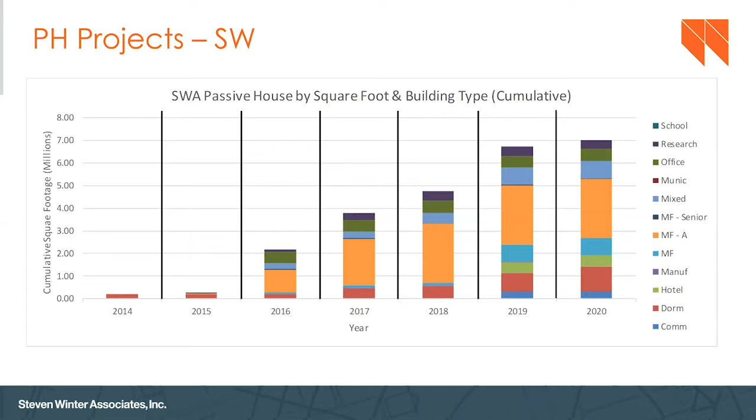As you can see on the legend on the right, it applies to just about any building type out there. It's not just that you can do it on multifamily or housing, you can do it on any type of project. The concepts apply. We've got everything from schools to dormitories to commercial office space, hotels, everything applies. The bulk of it right now is in multifamily particularly, but it spans the gamut of building types. As far as multifamily goes, we're reaching over 7,000 units today in the market that have been or are in the process of being certified.

Monte? Thanks, Lois. My name is Monte Paulsen, and we do similar work. RDH Building Science has about 250 people, and we're an employee-owned company. We work in offices in the US and Canada. Somewhat similarly, we're doing about 5 or 6 million square feet of passive house right now.

We do a lot of mass timber work, including facade engineering for taller buildings, life cycle assessment. We have our building science laboratories in Waterloo. We do future climate assessments, and we do a lot of renewal and rehabilitation. We learn from those existing building projects and apply that to our new building projects. I think you're going to go first, Lois, so back to you.

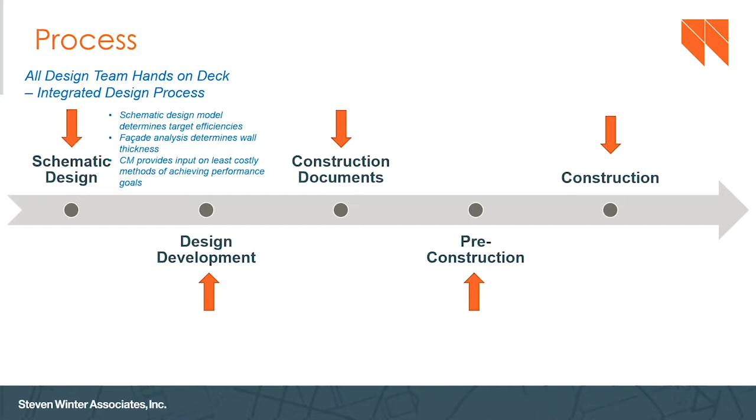So then we move from there into design development. We're figuring out at 100% DD is when passive house steps in to do their next major analysis of your project. Not that we're not at the table talking to you throughout and saying what's possible and what's not, but once you set those floor plates, once we get those layouts set, then we take that building and we create a more detailed energy model. And we confirm that everything we said in schematic is still in compliance. You never know, your window percentages may have changed or things like that. So we're going to make sure that everything is still in compliance from what we told you.

We're also going to start to do some critical thermal modeling depending on some special details you might have, like an overhang that you want to incorporate, or some cantilevering that we didn't know about in the schematic.

So that sort of stuff will get looked at very carefully so that the CM knows what we're talking about for thermal bridges and things like that, and any special materials that they're going to need to order for the project.

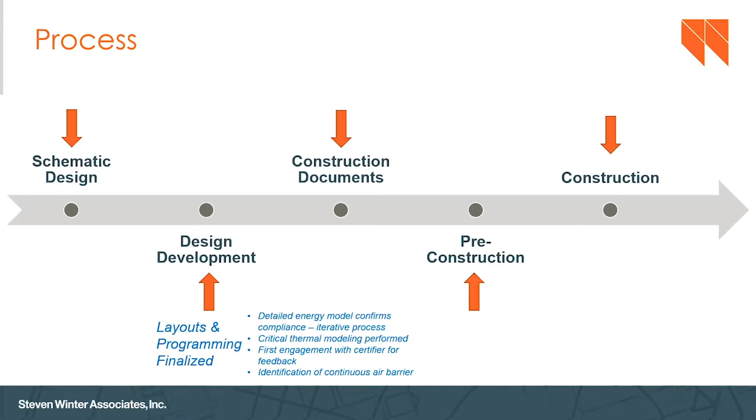This is also the time when we first engage with your passive house certifier, the certifying body that gives you the rubber stamp at the end saying yes, you did it. It's similar to LEED and the USGBC - you work with a project design team to check off your checklist, but in the end that whole checklist goes over to USGBC. It's the same thing for passive house. That whole checklist, everything we're doing, all the documentation, all the modeling has to go to the certifier.

So that's where we first engage with them, because we want to make sure we didn't miss anything big. And if you have a unique situation on your project, we want to get their approval for the way we decided to go through it. This is the time to get that approval, right? You don't want to wait till 100% CDs and have the certifier say, hold on, we don't approve of that. So this is when we usually first engage with our certifiers.

And I always say QAQC starts in design development, right? It's where we decide where your air barrier is going to go. As you know, passive house has a really stringent requirement for air leakage. So this is where you actually start saying, here's my strategy - it's going to be on my exterior gyp, it's going to tie into my roof this way, it's going to tie into my foundation this way, and it's going to tie into my windows this way. At what locations? You have your major systems already in your head about what section and what portion of the building, what surface of the building is actually going to be part of your air barrier. That's how we move forward as we go through design.

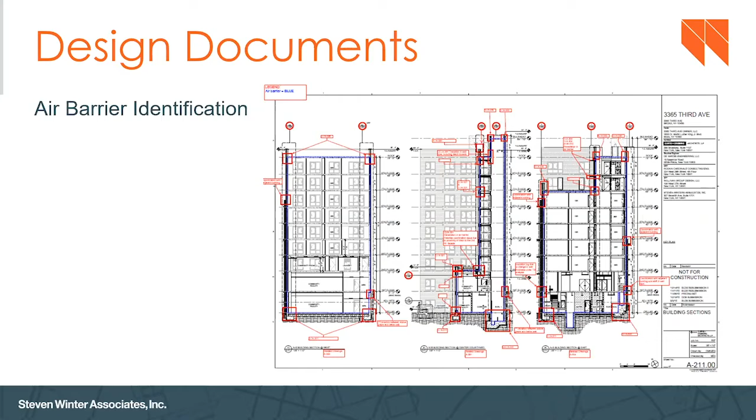Okay, so now we get into construction documents. From our perspective, for the plans we see on these large scale projects, this is where we get into the nitty gritty of our mechanical plans. This is where we finally start to get detailed drawings and riser diagrams and flow rates and things like that on the drawings. This is also where we see the majority of our building details completed - our junctions, our window to wall details, our roof to wall details. This is where the architect really dives in and gives us those up close and personal details. So we dive in.

So we don't just do one review of the CDs. We do a 50% review and then a 100% review. Now, it's not exactly those - sometimes people do a 90% CD set, whatever works best for the team. But there's typically 2 reviews is all I'm trying to get across to you. We do a review of the air barrier connections, as you know, a moisture barrier and all of that stuff gets reviewed here. But we also now start to do comprehensive thermal modeling of all of those connections so that we can make sure we have no condensation issues, no dew point problems within the assembly, no condensation potential on the inside of the assembly, say at the windows where they connect to the wall.

So this is really where we start the bulk, the majority, the remainder of all of our thermal modeling, probably 75% of all of our thermal modeling is performed in the CD set. We also start to create our QAQC tools and processes for the field.

We start to say, here's my checklist of items I need to see when I'm coming out for inspection so that you cannot cover them up. Sometimes we have unique conditions, sometimes regular conditions. A unique condition might be on the roof where I have dunnage and I need to put a thermal block between the roof concrete and that dunnage. That's an out-of-sequence thing that only happens once on the roof at one point in construction, when the blocks get put down on the dunnage. So I need to make sure I see that.

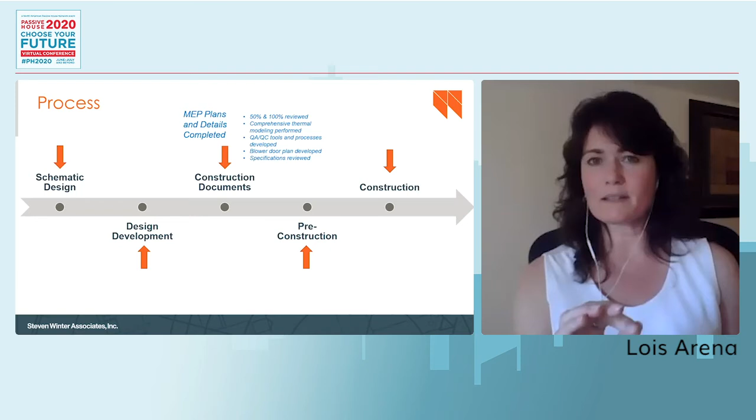For example, the MEP threw an exhaust fan into a room we didn't know about before because it wasn't on previous schedules. Now you've got an exhaust-only fan on a passive house project that we can't account for, that we can't use, that needs to be changed out. This helps us identify these things instead of waiting until we get on site and it's already installed, and then asking what happened. So the blower door test plan is a very useful QAQC tool, believe it or not. It may not sound it, but it's caught a number of things on many occasions.

We also do your specifications review during this period, to make sure plans match specs on everything highly related to Passive House - what your window details need to be, the specifications for every junction in every particular type of window in that building, every fan, everything. So we're going through all the energy-related specifications for our Passive House review.

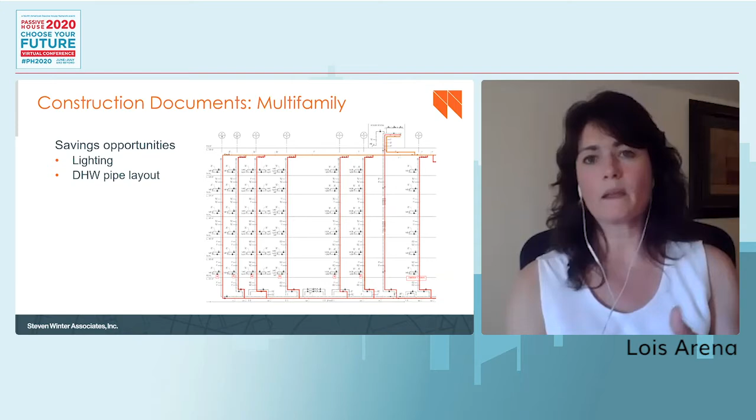So here's a typical riser diagram. But what I also want to tell you is, we're going to talk a lot about cost in this presentation, and nobody ever says, well, what does Passive House save me? It's more than just energy savings. We have on a number of occasions helped the construction team reduce materials in the field that have resulted in dramatic cost savings on top of energy savings.

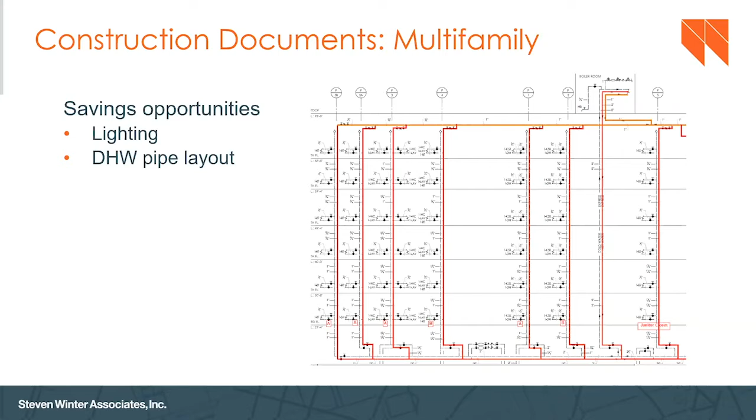So I'd like to give you a quick case study. This is Sendero Verde - all three buildings are part of Sendero Verde, but this is the main tower, a 37-story residential mixed-use tower. There's four stories of retail in the base and commercial, and 384 dwellings. I'm sorry, I forgot to put the gross square footage in.

It is about 350,000 gross square feet of conditioned space. So what happened was when we got the mechanical drawings and started looking at the domestic hot water, we noticed what we consider a 3-pipe design.

I don't know if that's the technical term. This engineer is a very good engineer, I'm not saying anything against him, and this is a very reliable system that they created. What it is, on the recirculation piping, they had a riser going up for a stack of apartments, and then the return loop came down, and it did that for every single riser loop for every stack of apartments it was serving.

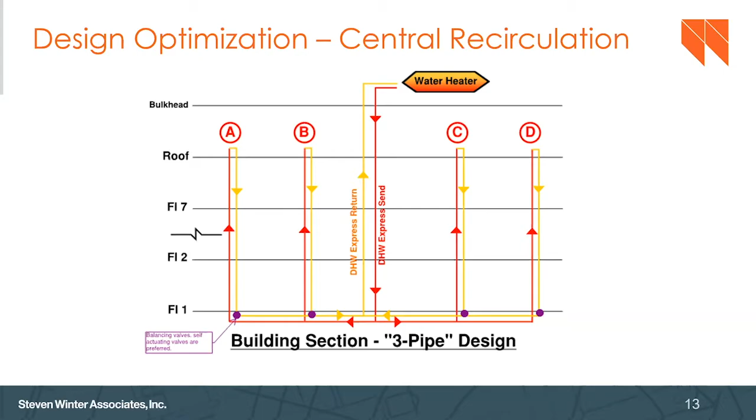The unfortunate part of this is an incredibly high amount of piping. And the more piping you have with domestic hot water, the more heat loss there is to the space, which increases cooling. It also decreases the efficiency of your domestic hot water system because of that heat loss. So what we wanted to suggest, and what we discussed with them, was a typical box design.

You basically have one riser going up, the supply riser that feeds the stack of apartments. You have this one supply length along the bottom like in the other design, and then you only have a simple return loop back to the water heater. This can be flipped where the water heater's in the basement, but basically you've eliminated all the extra risers running up and down the building on that return loop.

This reduced the distribution piping by 40% on this particular project. It's a very, very tall building. It decreased the pumping energy, reduced material cost, and reduced domestic hot water heating costs. That was about 10,000 linear feet of copper tubing, if you can imagine the savings from that.

Now, the concern the engineer had was balancing for this type of system. They prefer the other design because it's a little easier to balance, a little more self-regulating. This one, however, needs a thermostatic valve at the top. That's fine, they felt comfortable with that. Once they talked to the plumbing contractor, they said this is a very typical design.

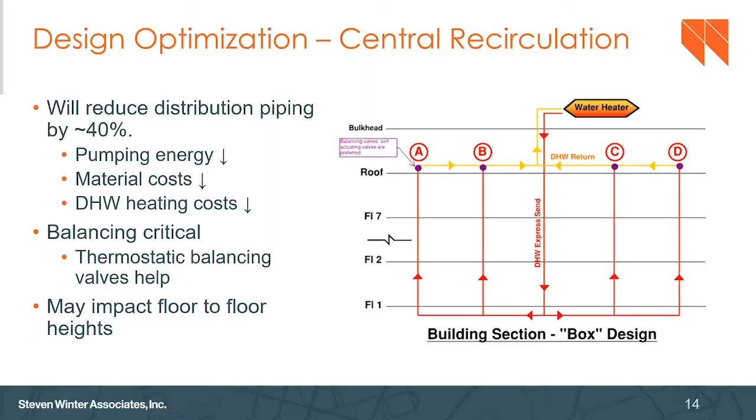And once we did this analysis, everybody was on board—the plumbing contractor, the MEP, and the owner in particular—because they were going to save so much money. So this is the type of thing where doing Passive House is actually a benefit financially. It's not just always a cost.

So they switched from the 3-pipe to the box design. It saved, as I said, 10,000 linear feet of recirculation piping. It was an 18% reduction in domestic hot water heating energy demand, and a 16% reduction in cooling. So this is a pretty drastic improvement in energy efficiency that also results in cost savings to the owner, the developer.

Okay, so that's construction documents. Then we get into pre-construction, right before we start construction. This is where estimating and bid reviews come into play. Your Passive House consultant, believe it or not, is involved in this—should be involved in this—and can help make sure everything is complete and that you're saving money here, because the unknown always results in an 'oh my God' factor in pricing.

I don't want to say the swear word, you know what it is, but what you really want is your energy consultant at the bid-buy meetings to ensure the scope is understood by the contractor. We've had many times, and I'll give you some examples later, of contractors adding costs because they don't really understand the Passive House process. When we review the estimates, we're like, no, this isn't going to be a problem, you can take this out. This never happens, you can take this out.

So it's very important in the bid-buy meeting to sit down with the subs that are going to be bidding and explain the actual scope of work, letting them ask questions so they make sure they get everything. A lot of times they assume it's a typical building, even though you tell them it's a Passive House—they don't realize something in their scope or spec is very different from what they're typically seeing. They don't bid it, we don't catch it, nobody catches it, and then at the end, it's considered a change.

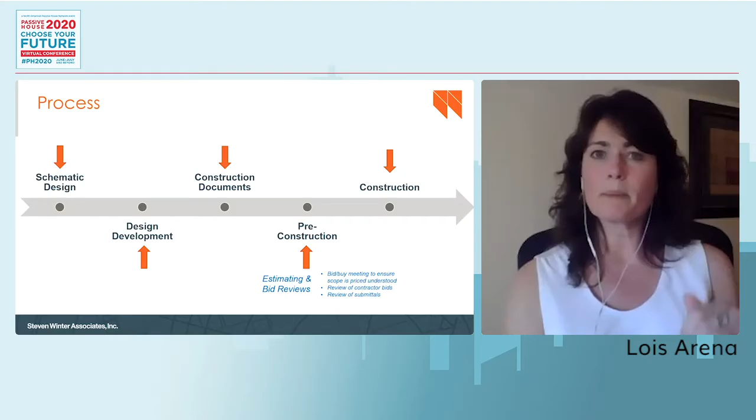So, a change order, you definitely want to minimize those. Everyone knows that. So we want to review the contractor bids, be part of the bid buy meeting, and also review the submittals to make sure everything matches. It happens time and time again where the submittal doesn't meet the performance in the specification, and you'll get, well, that's our typical, and you're like, no, that's not what's in the specification. It's a really comprehensive process when you're part of a passive house project.

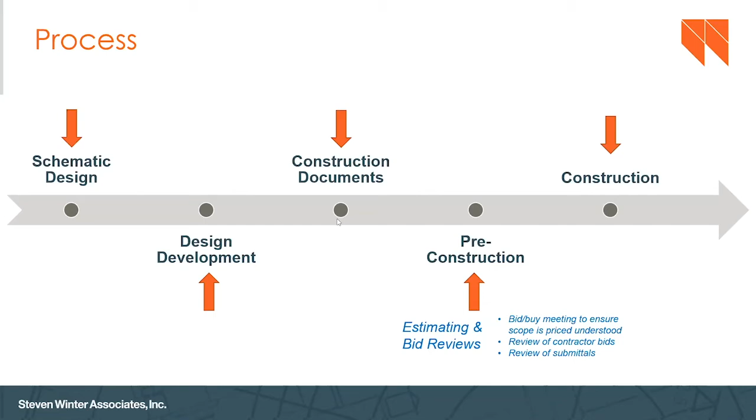Ventilation design and controls - controls are very important, make sure they get into the documents. And then domestic hot water design and installation, as you just saw. We actually have a lot of problems with the wrong thickness of insulation being put around the hot water pipes. So it's really important, if you're going above code, or even just making sure they understand the code - sometimes they'll say, well, we always put this type of insulation on this pipe, and you're like, no, the code here says you have to use this. Making sure whatever they're installing in the field matches what was modeled and what was in the specification is really important. This is just an example.

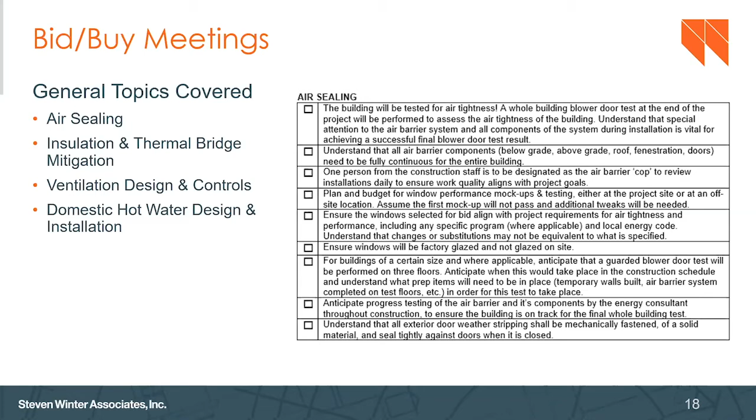So we do a pre-construction kickoff meeting. These are an example of those checklists we were talking about, where we go through the plans and specs - the drawings, plans, sections and details - and make sure we call out anything that's not typical on the project. This is a very atypical detail that was on this particular project, so we had to call it out and let the contractor know we would need to be inspecting this detail.

So during the construction kickoff, we go through the inspection checklist with them. We tell them what our intermediate testing plan is, what the blower door test plan looks like, who will need to be on site, and that we'll be revisiting that blower door test plan when we get closer to the end of the project. You can't expect everybody to remember that sort of stuff, but it's just a good eye opener at the beginning of the project that this is all happening, and the subs need to know that.

We also do an MEP kickoff with our HVAC subs, because it's in the drawings and in the specs. They're not used to doing passive house, so we need to make sure they understand the requirements of the mechanical system, the controls, placement of exhaust vents - sometimes incredibly crucial, needing to be a certain distance away from certain things. So we want to make sure the HVAC subs are really on board with what needs to happen.

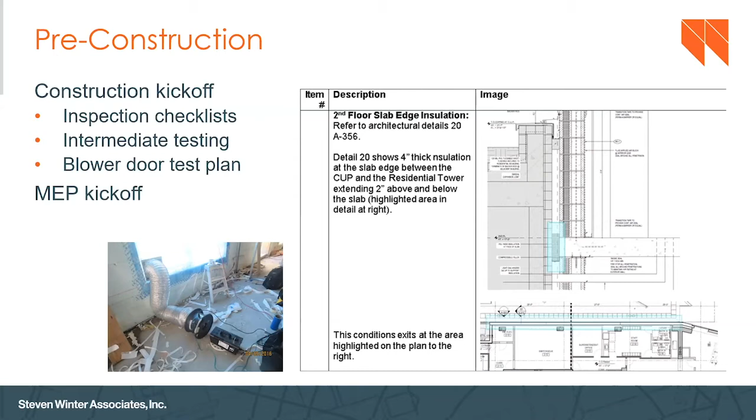Okay, so finally, you're ready - everybody's up and running. This is where our QAQC actually kicks in. We start our contractor trainings, we do mock-ups for the actual trades in the field. This is when we start our site inspections of all the insulation and all the passive house related issues we need to confirm and photograph. We also start our intermediate testing, our mock-ups and window testing, and any other component we're worried about for air leakage. And we attend meetings and provide additional support to handle things like RFIs - okay, how is this attachment really supposed to work?

Or, you know, I can't get this insulation in there. It's too thick. Can I use a thinner insulation? And so this starts this process. There's always a portion of additional technical support during construction that we deal with.

This picture is just an image of a mock-up test for a window. This is what we call interim blower door testing. For large projects, you can't stop the project halfway, once it's dried in at the top, and just do a whole building blower door test before they drywall, because that's not how it works. Drywall starts at the bottom before they're even finished at the top. So we had to find mechanisms to test things as we went along.

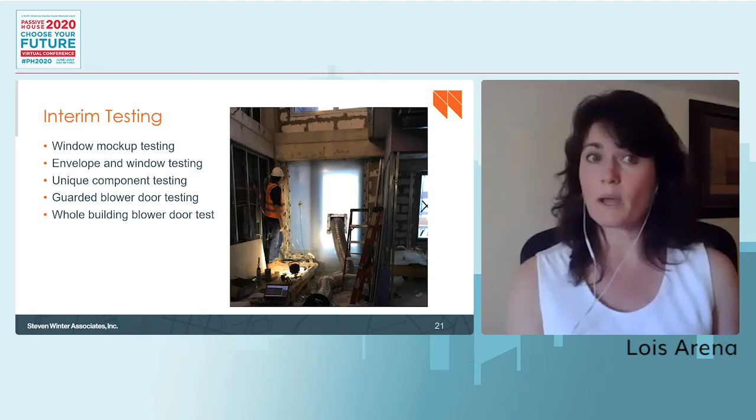Interim window mock-up testing, envelope and window testing, any unique components like trash chutes or odd things we're worried about, we can test as well. You can test a whole floor at a time with a guarded blower door test if you're very, very concerned. It does take maybe a day or two away from the construction staff because we have to shut the site down, at least on those floors.

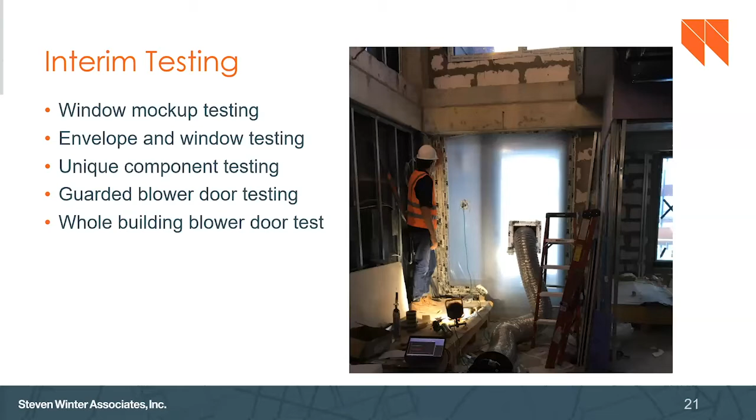But it's a very useful test to give people peace of mind if they're uneasy. And then at the end, we do the final whole building blower door test, which is what this looks like. Everything's hooked up to our trusty computer. All the fans are tied in, and we pressurize and depressurize the whole building at the end to make sure you've met your goals.

But this is like the last step. This is the cherry on the cake. You've done everything you needed to do at this point. You've got all your inspections, you've got approval on everything, you've done all your interim testing, and your contractors have learned the whole way. And then at the end, we do the final blower door test.

So Monte, that's my spiel. Back to you. Thanks, Lois.

That was great. I really agree with the timeline, the focus on early involvement of design, early involvement of the certifier, and the real focus on kickoff meetings with specific teams. So important. Okay, so how much does it cost to do all this?

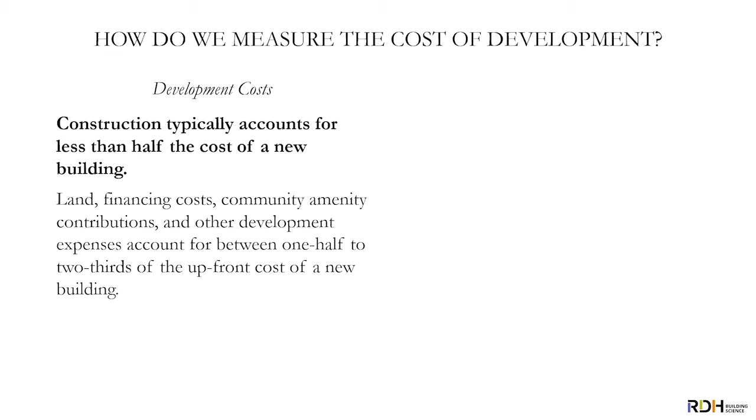We do work on large urban buildings, such as those Lois has shown. We also work on a lot of affordable housing projects, wood frame mid-rise. We see that development cost typically accounts for more than half the building, and construction costs less than half the building. And we note that operational costs can be a bit lower in Passive House.

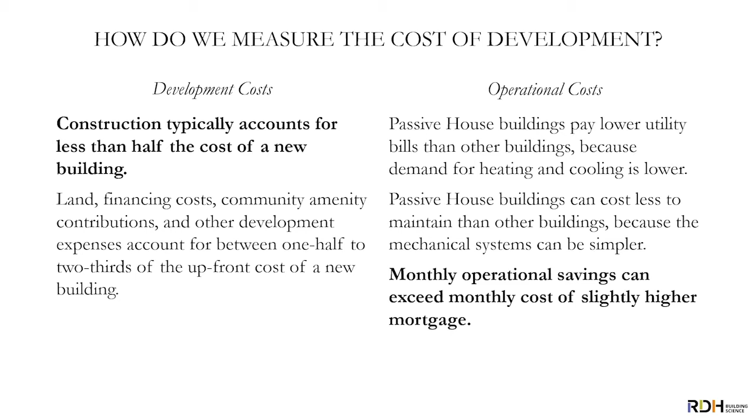You have lower utility costs. You may have lower maintenance costs, depending on how it was designed. For many developed Passive House projects, the monthly operational savings can exceed the slightly larger mortgage on the project. So it's important to note, construction cost is only a portion.

At the low end, we see projects around $250 a square foot, not just Passive House, everything. And at the high end, towards 500. A 5% construction cost increase on that low end is still only a 2.5% total cost increase. And that 5% construction cost increase can be as little as 1.something% of the larger building.

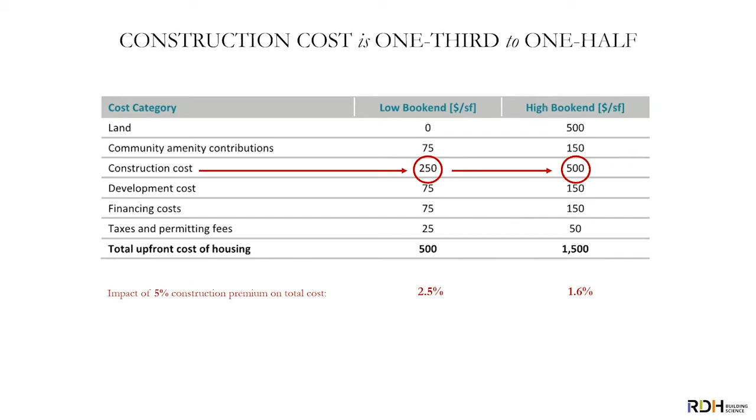Nonetheless, the question I get almost every single day is, how much does it cost to build a Passive House? And they're looking only at the build costs. So let's answer that briefly. Three studies I'd like to show really quick.

Just to put those numbers in context, 1,500 pounds per square meter is approximately 172 US dollars per square foot at the current exchange rate. Now I would note most of these were built over the last few years when the pound was a little stronger.

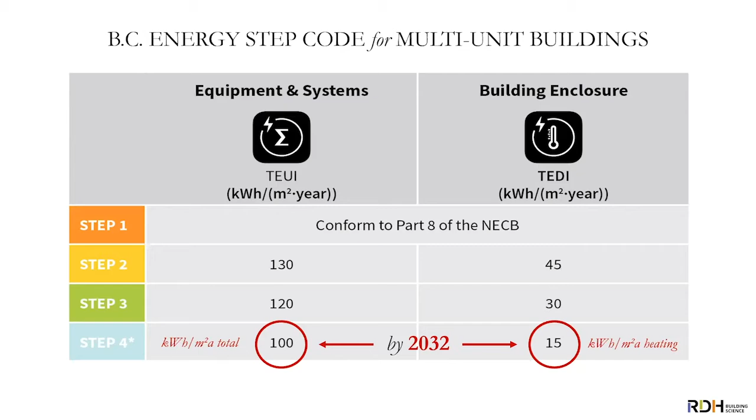A second cost study that we reference here in British Columbia quite a bit is when we introduced our STEP code, we did some studies on how much it was going to cost to do this. Now, the STEP code is not exactly the same as Passive House. By 2032, all of our buildings will be at a 15 kilowatt hour per square meter heating limit, very similar but not identical to Passive House because the floor space is measured differently, and a total energy limit of about 100 kilowatt hours per square meter. So similar but not identical.

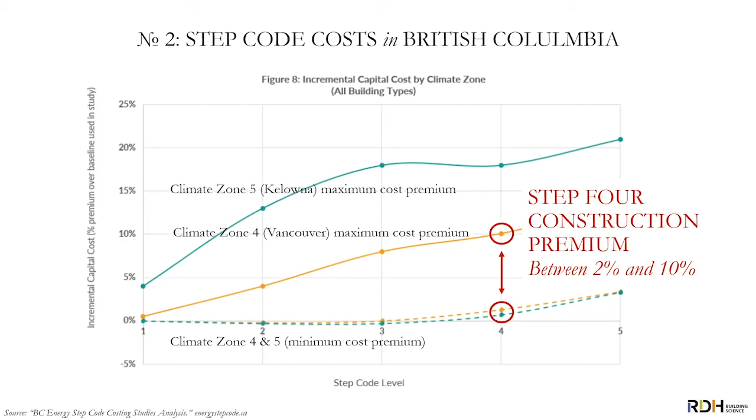That study found that to get to those step 4s in most of our climate zones was about a 2 and a 10% premium. We would say that's been consistent with what we're seeing in Passive House.

Our first larger multi-unit Passive House here in Vancouver had about a 5% additional construction cost. Now, again, that building is paying off. The overall operating costs are very low, but it had about 5% build cost. By this year, we've seen this project at step 4 and a couple of other Passive House projects coming in pretty much at par with construction costs in the area.

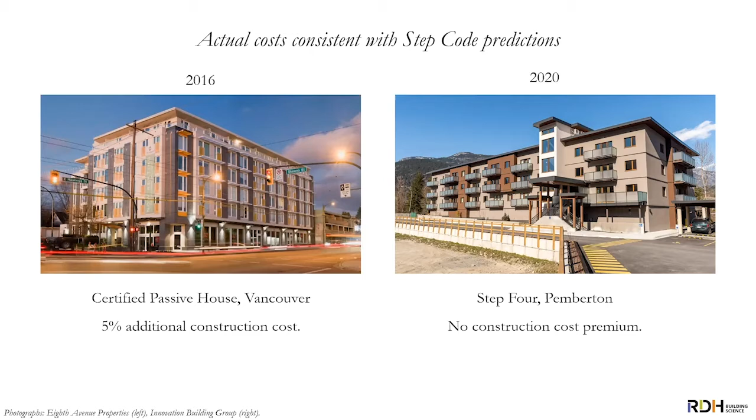I would add that the Vancouver Zero Emissions Building Exchange, or ZEBx, is surveying construction costs, and we hope to have a more in-depth report on construction costs for buildings in our region published later this year, so please stay tuned. And the third way to look at construction costs is some data from Pennsylvania.

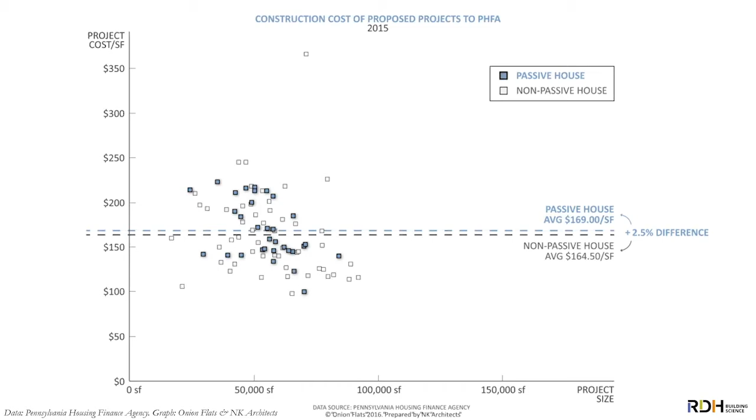In 2015, the Pennsylvania Housing Finance Agency added 10 points for Passive House projects to their scorecard. And what happened that year was they got a whole bunch of submissions. Here's some graphs that were put together on this. The Passive House proposals ran about 2.5% higher than the non-Passive House proposals in that year.

Interestingly, however, by 2018, the awarded Passive House projects ran about 2% less than the awarded non-Passive House projects. So you're seeing at these affordable, focused, mid-rise, typically wood frame Passive House multi-unit buildings, we're very, very close to other construction costs. And I just want to look at 4 quick case studies in case you're still skeptical.

I chose ones around North America since this is, after all, a North American Passive House project. So the project we just looked at in Vancouver, 85 unit market rental. This had the difficulty of not originally being designed to Passive House, but being converted early on. That generally drives up costs quite a bit. This in US dollars was about 170 bucks a square foot.

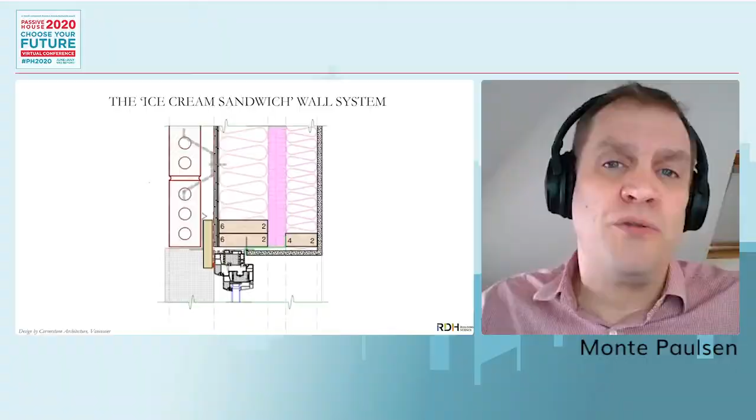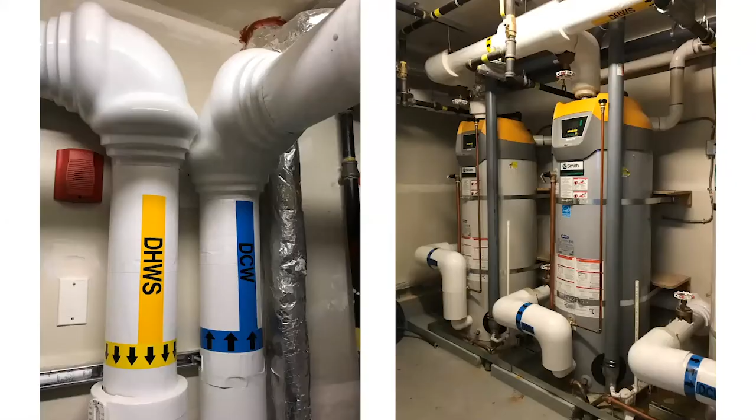Had a really simple wall assembly designed to require as little trade change as necessary. The trades framed and clad the building the same as any other. Really simple interior insulation strategies at the parkade and the commercial levels. Really simple mechanical systems, not that different from mainstream practice at the time. Pretty typical fit and finish for this market. About 225 Canadian, again, about 5% construction premium.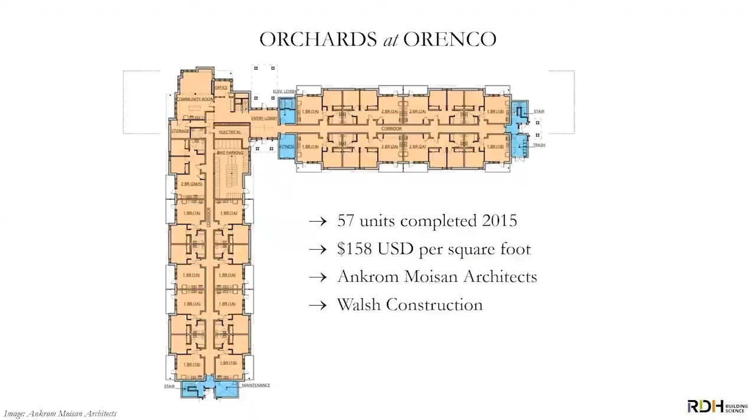Portland, Oregon did a great project about the same time. Orchards at Orenco, some of you have probably seen this. This was about 158 US per square foot in 2015. Pretty simple form, simple mix of a thick wall and a little exterior insulation to limit the thermal bridging.

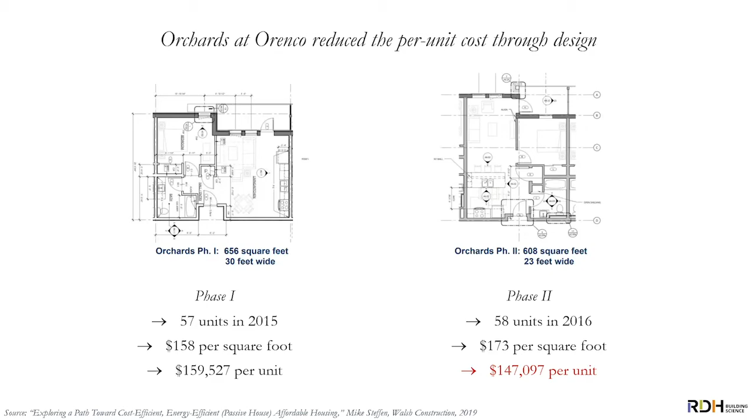What's really interesting is the same project changed its design for its second phase. On phase 2, they had a higher per square foot price, but a lower per unit price. So they actually produced more units for less dollars by redesigning the units a little bit. This emphasis on elegant, efficient design that both saves money in construction and makes the building more efficient from an energy perspective is a big part of what we're working with an awful lot of nonprofit and market rental developers to do, to find ways to build Passive House for less.

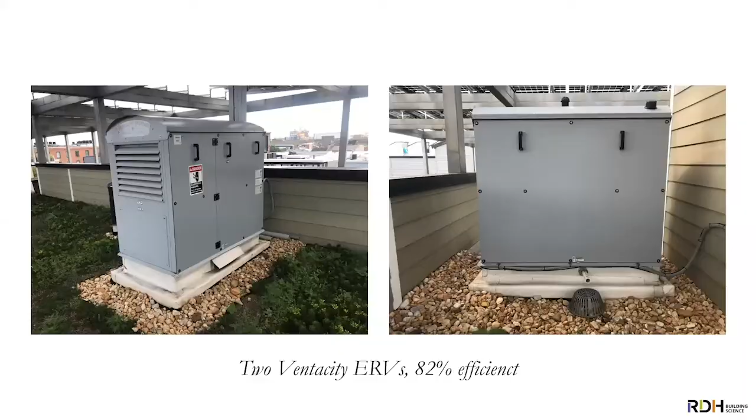Philadelphia, Capital Flats in 2017, 169 per square foot, including some solar. This used the prefab wall panel, the smart panel system, as quite a few of the really affordable minded projects have. Simple windows, simple form, simple central ERVs. Those 2 ERVs serve the whole building. And 25 one-bedroom suites for about 169 per foot, or 146.6 per unit.

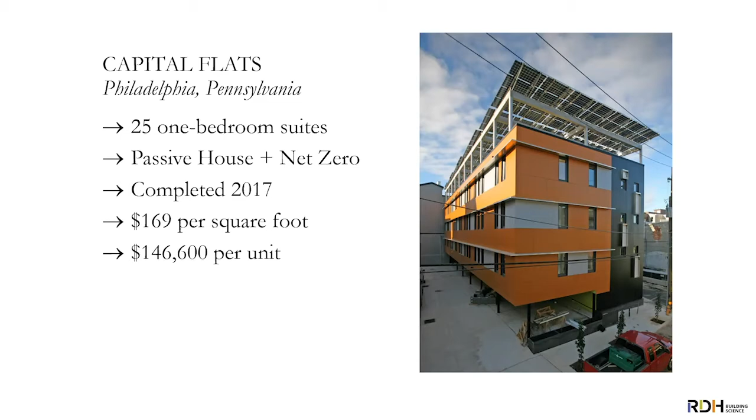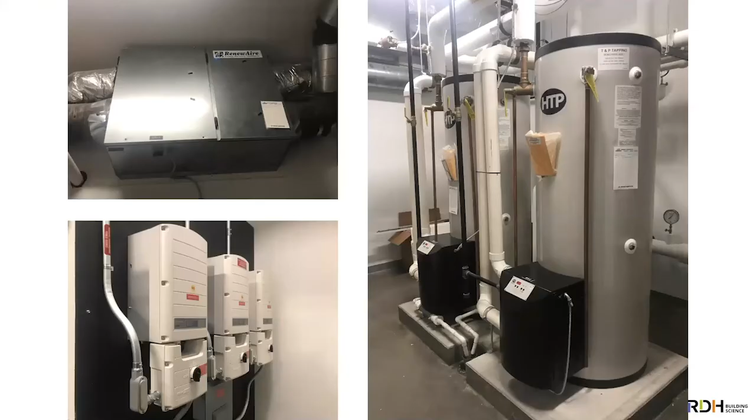And then final kind of a cost winner is Bayside Anchor in Portland, Maine. A really simple, thick, blown insulation, super simple form factor. This is an infill project in an existing affordable housing development. As you can see, really simple, affordable housing. So simple, they didn't even put cabinet doors on in the kitchen, but a perfectly nice unit in a fantastic neighborhood in a great city. Really simple mechanical systems. Central service area that served other buildings as well as itself. 149 bucks, 150 a square foot US.

Personally, I would say it's possible to accept a lot of sort of adjustments for those prices. So you look at these 4 projects, and we could have picked another 4 from the same time. We just had to kind of draw the line somewhere.

170 to 149 per square foot in the 2016 to 2018 range. The market standards across the US in that same year, as reported by RSMeans, are kind of 169 to 223 per square foot, with 261 as the high in Chicago.

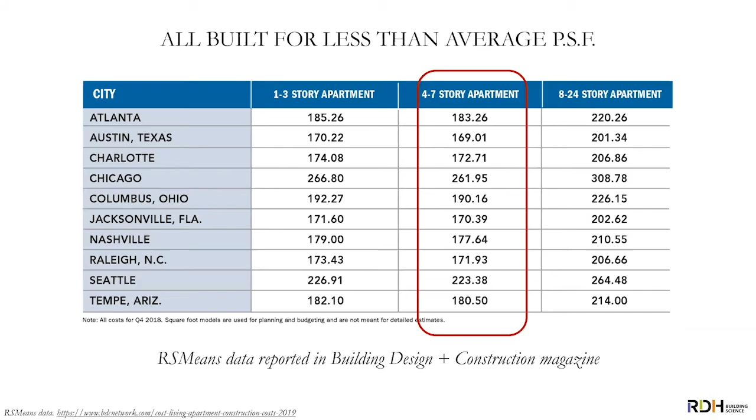My point being that all of these developments, and quite a few others, were at par for regional affordable housing rates during this time, and we can still do that even in the difficult economy we might face going further. With smart design, Passive House or near Passive House projects don't have to cost more. Back to you for just a few, to look at costs on your projects, Lois.

Thank you, Monte. That was a really great summary of affordable housing. I'm going to take you to the New York City area, the Ritz-Carlton of affordable housing projects.

Our prices, I don't have the ranges here on this slide because we're trying to keep most of this information anonymous, but I have 16 projects that we were evaluating, all large scale Passive House projects except for one. They're all over 35 units per building. The large ones are like 50 to 150 units per building. The extra large are 150 and over, so somewhere in that range.

So really large projects. The price per square foot on these buildings in Manhattan and the boroughs are more like upper $300 per square foot to close to $700 on some projects. What I'm showing you here is the average increase, in the 4th column, to do construction over Passive House - anywhere from 1 to 8%.

And I've highlighted those projects that have had Passive House experienced team members on them. If you look, you can see every single one of those was either 5% or less increased cost above their baseline. The two in blue are dormitories, so they're not an exact apples to apples comparison to the other buildings, but they are highly dense.

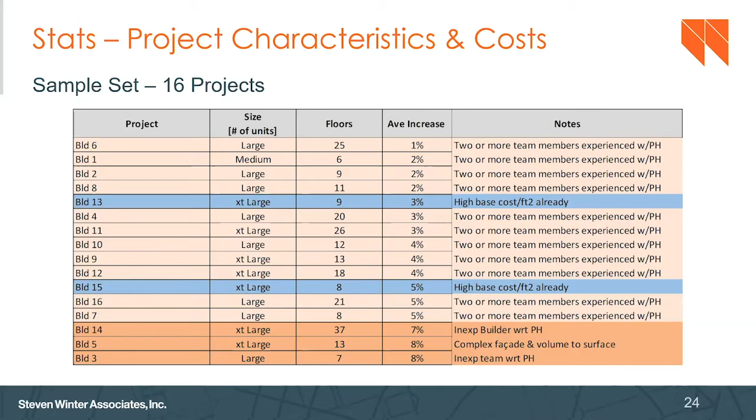Now you have to keep in mind, several of our builders, when we were talking to them about the survey, said, you know what, we don't price a building as non-Passive House and Passive House. We have a project and we price it at Passive House. Every building we do is different. It's going to cost a different amount of money on a different site. They all have different challenges, especially in these urban areas.

So it's not like we really know. They're like, isn't it just about quality? And shouldn't quality be part of affordable housing? So it is a very interesting set of comments that we got back from them.

But of that subset of buildings that I just showed you, here's the range of certain characteristics I wanted to show you. So we ranged from 30 units, by far our smallest, to 385 units in the largest. On average, we have 184 units per building, and that's a pretty good number.

Gross square footage ranged from 33,000 to 386,000, so 10 times larger. We had anywhere from 6 to 37 stories of building, and the increase for Passive House ranged from 1 to 8%. Total project costs ranged from about 12 million to 233 million. So I'm just trying to give you a feel.

Here's that cost per square foot range I was telling you about, $300 per square foot up to $832 - a huge range. The average was about 527. So, just a massive increase in cost. Anytime you go above a certain number of stories, you really increase your cost per square foot for your project anyway. That's a fact of mid to high rise construction.

What I wanted to do here was quickly try to see what building characteristic was actually going to increase the cost the most. What was the biggest contributor to cost increases? Was it number of dwelling units?

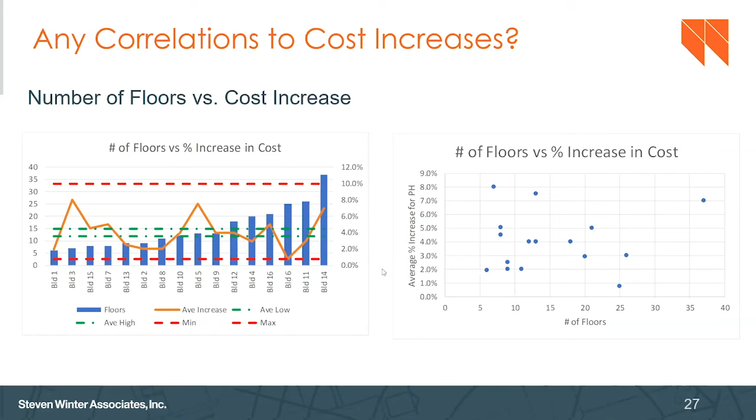Number of floors - we did the same thing. As we get taller, does it get more and more expensive to do Passive House, or less and less? Again, you'll see all over the place with these numbers, buckshot again. So no direct correlation to height of the building or number of stories.

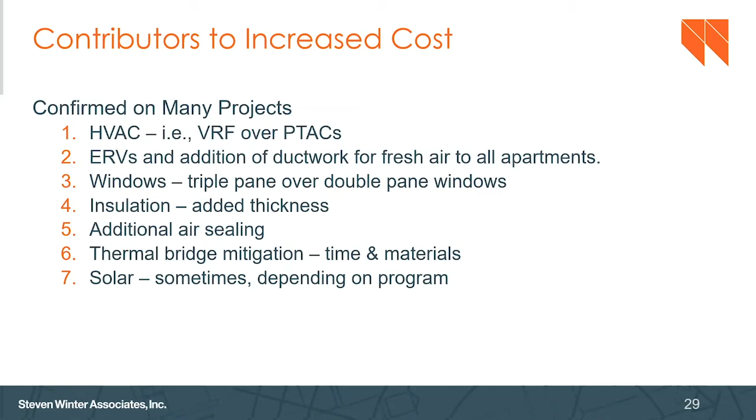Now what I will tell you is these are the main factors - the biggest cost contributors. Everybody we asked, the top 5 are the top 5. This is what they said added cost to their project. HVAC - the standard VRF system over a typical PTAC in a high-rise building, that's going to add cost.

ERVs - the addition of fresh air supply to all the bedrooms, and some of the controls. The ERVs themselves are a little more expensive than exhaust fans, but it's really the addition of all that sheet metal work that has to happen. Windows - we're typically seeing the increase from a good double pane window to a good triple pane window. That's the cost increase there.

Insulation, added thickness - this is a little bit arguable, because on a really well-designed passive house building with a nice surface to volume ratio, we're not looking at insulation values much higher than code. It really comes down to the detailing and thermal bridge mitigation - what special materials do I have to use to separate my cladding attachments and that sort of thing - and then the additional air sealing.

Honestly, I think this is just where the scare factor is. People hear that they need to be 10 times tighter than code, and there's an additional cost on it, when really you can do air sealing with your typical materials - it's just attention to detail. Once contractors actually see what they need to do, it's just a matter of completing that air seal in a more complete way than they're used to. I think that cost is going to sort of go away on us. So that's one of those costs there.

So the questionable one we heard was training of construction staff. To an extent, yes, but it really is part of what we usually do. We've had teams hire a special air barrier, air sealing consultant, and we've had teams that haven't, and we've passed the blower door test on both ends. So really, I think this is a questionable cost that people are just afraid they're going to have to do.

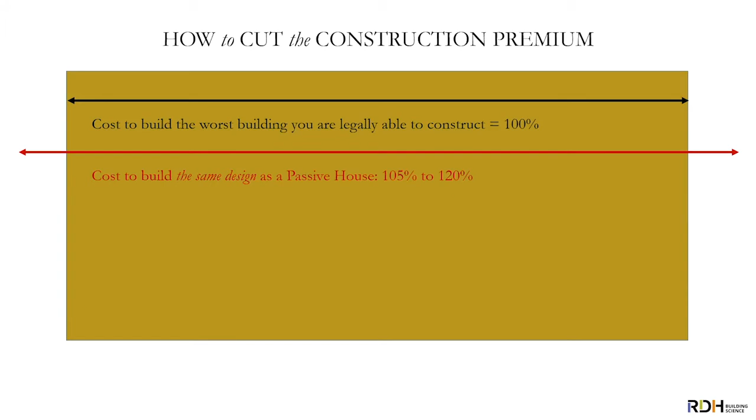And I do want to be clear, if you take the exact same design as the building you might have built alternate and cost it as a passive house, it's going to be more. You're going to put more on it without taking anything away, without changing anything, without rethinking anything. So if you build the same design with no awareness of change to the passive house standard, you should anticipate 105%, and we've seen 1 or 2 up near 120%.

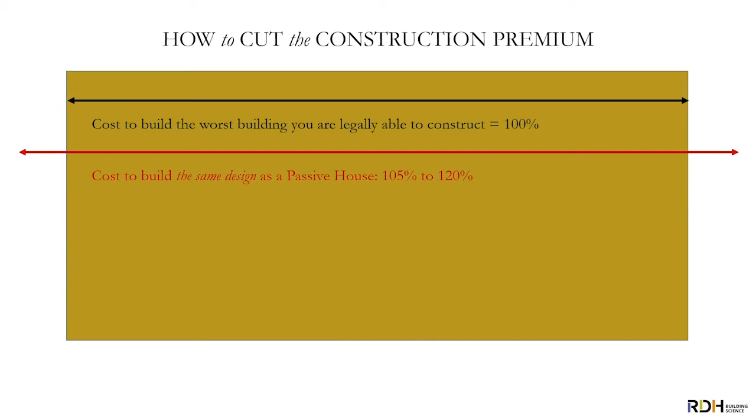But you wouldn't do that. You're not going to take a pre-passive house design and build it to passive house standards. You're going to redesign the building and rethink the process, as Lois and I have been trying to describe. Think of it this way conceptually.

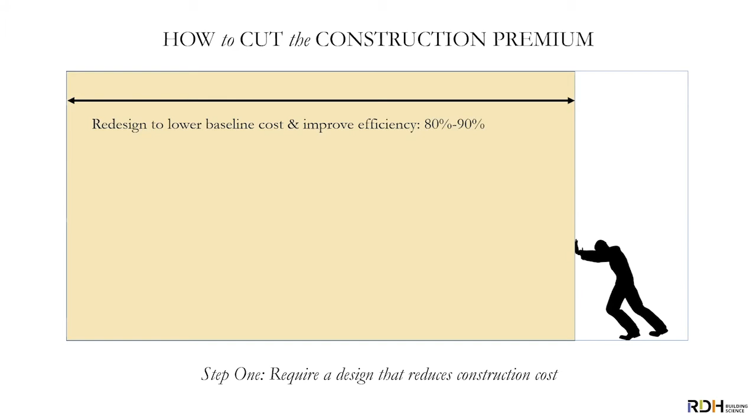First, shrink the building, lower that baseline cost by being hard at the front end, by really asking, do I need all of that glazing? Do I need that jump out? Do I need this, whatever the feature is? Limit the window-to-wall ratio, reduce the enclosure surface area, demand compact mechanical cores, triage step backs and balconies as much as possible within your jurisdiction and your purposes.

Make the tough choices before you hire your architect. This is your job as an owner or as a developer. Put your tough choices, your metrics in your owner's project requirements. And I want to point out, that's the document.

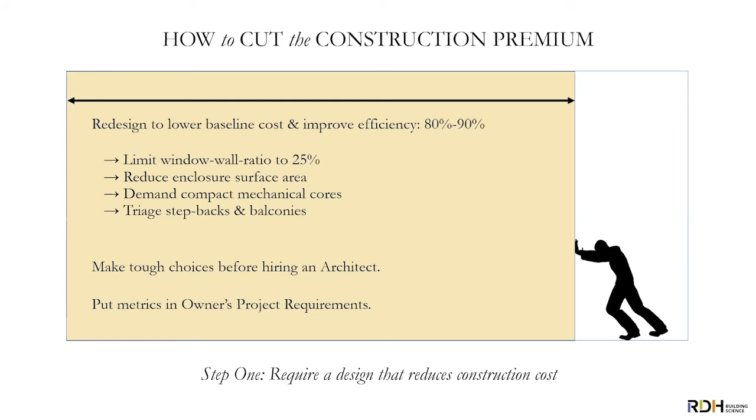This is your opportunity, and that's you pushing back on these things. You're the only one who can do it. It is not going to work asking your project team to cut 10 or 20% out of something. It's the owner's job, and the owner can do it most powerfully at the beginning of the process.

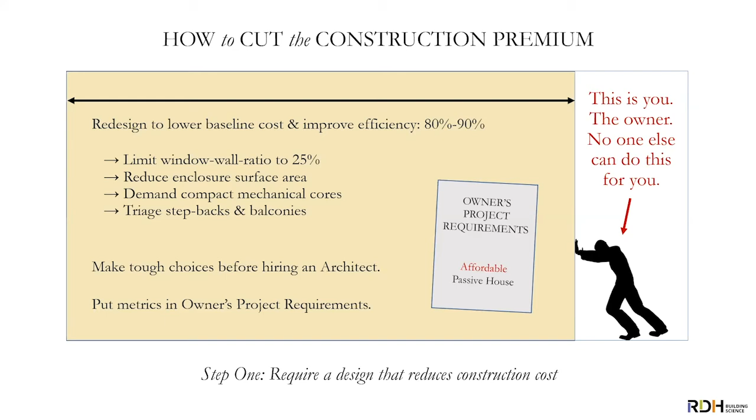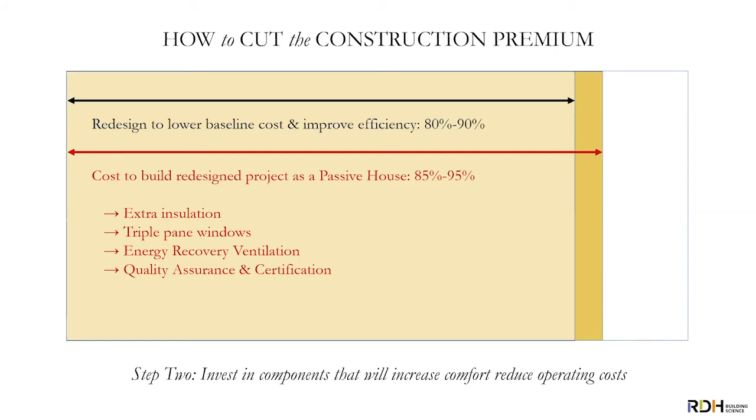So having reduced the baseline costs, then you can add back some of those things Lois just pointed out. A little bit of extra insulation, triple pane windows, the mechanical systems that drive these large multi-unit or other complex use passive house projects, the quality assurance and certification processes, all those visits Lois talked about, those cost money, those cost time.

Add back 3, 4, 5% for those above your carefully redesigned building, and you are still ahead of your original costs. And what I've seen the best projects do is they get really hard at the front. They add the minimal additional cost for passive house, again, making this approach clear in the OPR. And then with the slack they've got left, they put in what they love, what's important to them as a project.

Maybe it's a big bright stairwell under a skylight, or a photovoltaic pergola over a shared roof deck, or real brick cladding or some other feature. But they take all of that stuff out in the baseline so they can get to where they want to be.

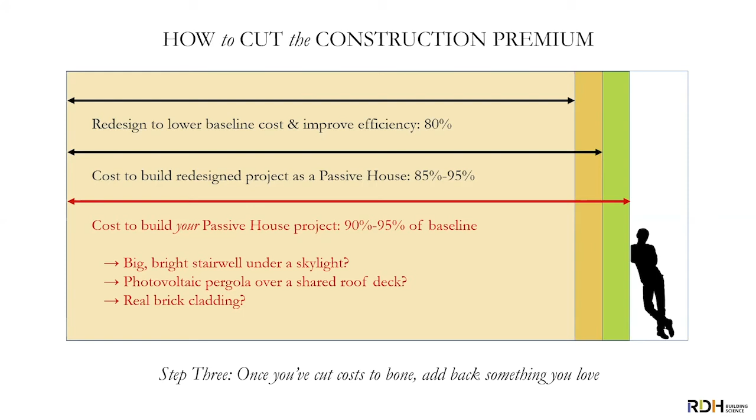This approach works. Whether formal or informal, this is the approach that each of the projects we showed earlier, those 4 very cost-effective projects, followed.

So you might ask, what should you put in owner's project requirements? I just want to say there's a good example of an owner's project requirements on the ASHRAE site. They created their OPR for their own headquarters. It's quite detailed, and it's a good example of a great OPR document. You're welcome to Google it.

A not such good example is this, and I'm leaving it anonymous, but here in the OPR, the early documents are saying, well, we're not going to pursue any certifications, but we want this program to exceed Passive House, to exceed Net Zero Plus, and to exceed Living Building Challenge without certifying or doing any quality control to anything.

This is a real document, and I apologize if you know who it is, but I do see this kind of approach routinely from owners. This well-intentioned owner has not made the hard choices. This owner has not done the pushback before bringing the consultants aboard. And this owner will struggle with costs all the way through the project as a result of not being disciplined at the front end. So what would you put in?

I just want to list 4 things that I would put in if it was my project. I would demand that the project lay out mechanical first. I would demand a minimum surface area given the rest of the project. I would force the facade to follow function, and I would set a target for window to wall area that was appropriate to the project. And I would repeat what works and look for creative repetition as much as possible. I'd just like to share a few thoughts on each one of these ideas.

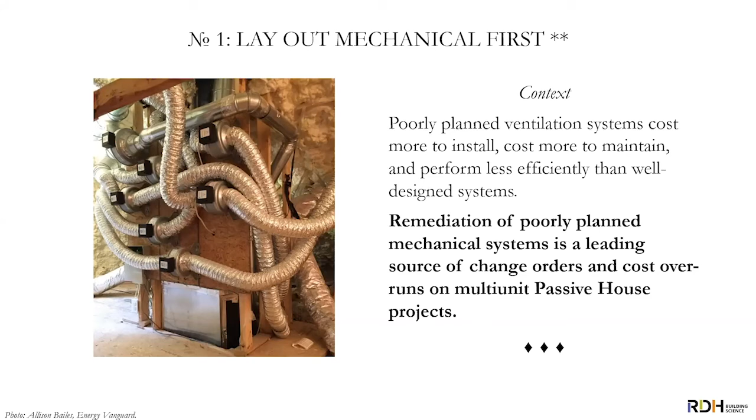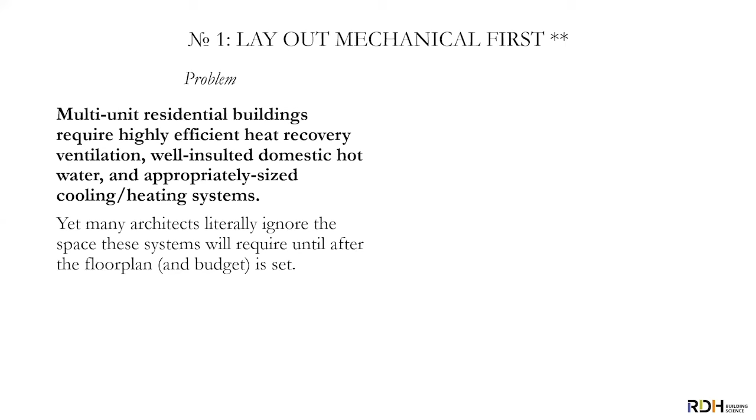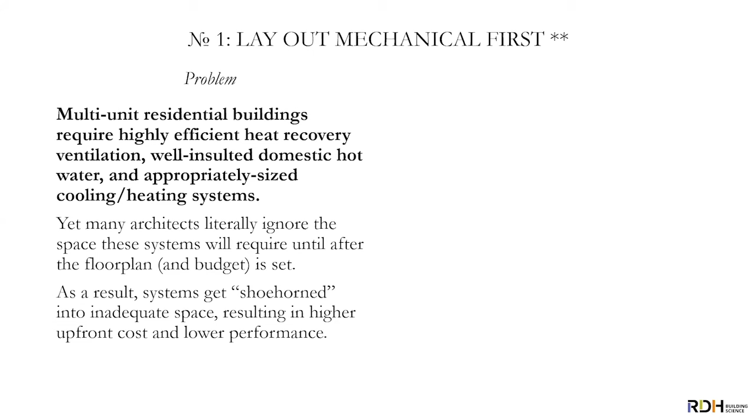Multi-unit buildings require highly efficient heat recovery, well-insulated domestic hot water, as Lois showed. And yet many architectural teams are kind of ignoring these at the critical early stages, figuring it'll get taken care of later. As a result, systems get shoehorned into what space remains rather than designed to be low cost in a space meant for them.

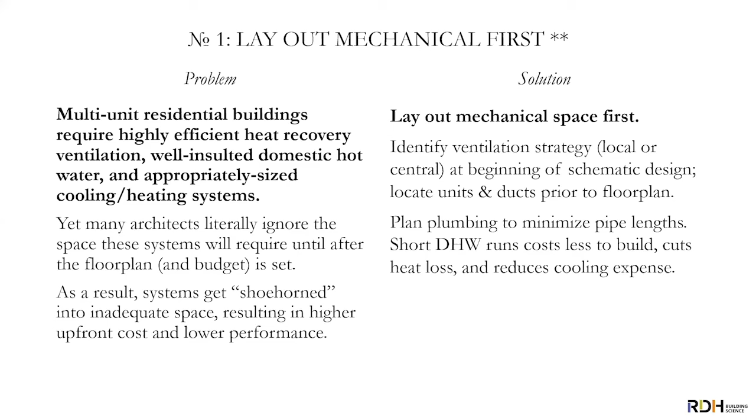I propose in the OPR and in your process, lay out mechanical first. Before you do a floor plan, decide on your ventilation strategy and some of your core mechanical strategies. Plan plumbing pipe lengths from the start. Track your lengths, as Lois showed that great box diagram versus the up and down risers. Start tracking that stuff in the early discussion. That's your money you're spending. You should know what you're going to spend on it by tracking it.

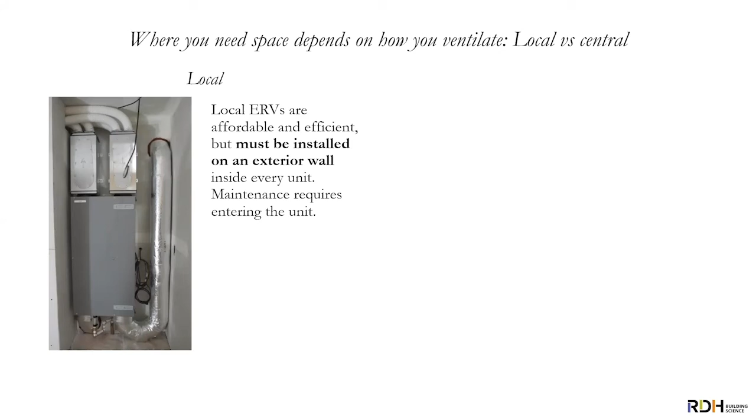As an example, you can do multi-unit passive house with local ventilation, like shown on this slide, where it's on the wall, but it needs to be on or very close to an exterior wall in every single unit. Or you can do it with a central system like this Swegon shown, or even bigger systems like the one Lois showed on Cornell. Either system works, there's merits to each, but they go in fundamentally different places in your building, and they take space in different ways in your building.

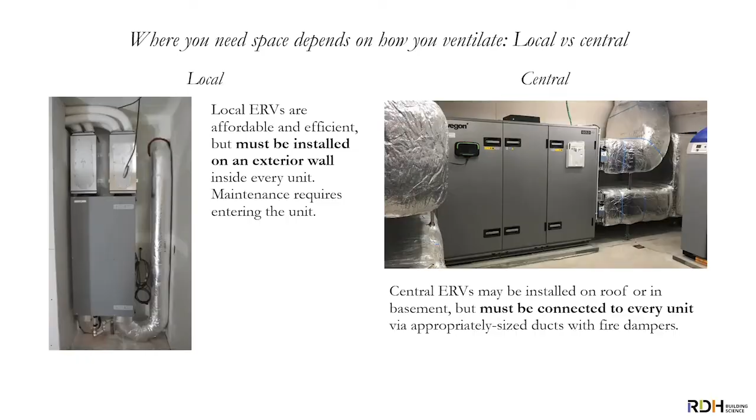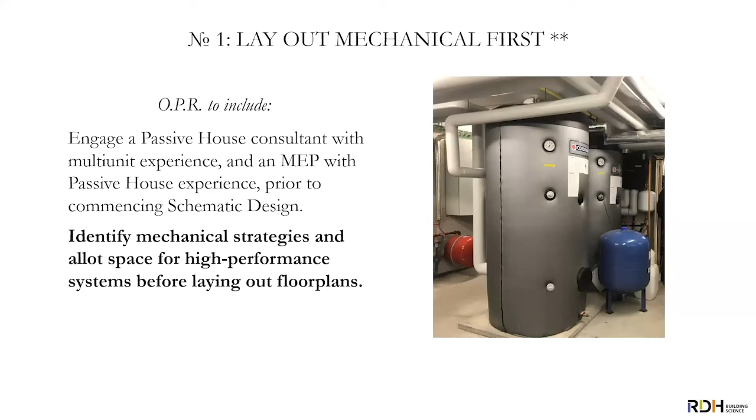And this is a decision and a conversation the owner should have before schematic design, before you start laying out units. And to wait and do this later always costs more. So your OPR should engage a passive house consultant with multi-unit experience and an MEP with passive house experience, and have them deeply involved prior to schematic design, working closely, of course, with your architect. And you should identify mechanical strategies and allot space before laying out floor plans.

Okay, number 2, minimize surface area. You know, the famous book Pattern Language advised us to wrinkle the edges and turn the corners to achieve light on 2 sides.

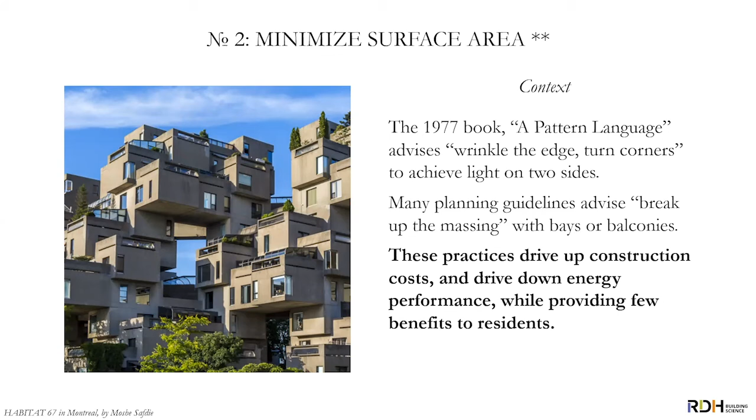Many planning guidelines push these same sorts of ideas. These practices drive up construction costs while driving down energy performance. To the degree you can within your planning metrics, you need to push back on these.

Bays, step backs, balcony insets, and other wrinkle-the-edge strategies raise your cost twice. Once, they increase the cost of construction materials and labor. And then again, you have to offset the additional heat losses, so it's more insulation or trickier thermal bridges or trickier window installs and additional hard costs to remedy these things.

The solution is to require affordable housing achieve a form factor as close to 1-to-1 as feasible given the building. It might be a little bit more than that in some cases. Count your corners and cut them.

Eliminate as many wrinkles as you can. Eliminate step backs. Avoid structural cantilevers wherever possible. There might be a way to do a structure outside the building if it's a mid-rise building. Decorate the enclosure, don't decorate with the enclosure.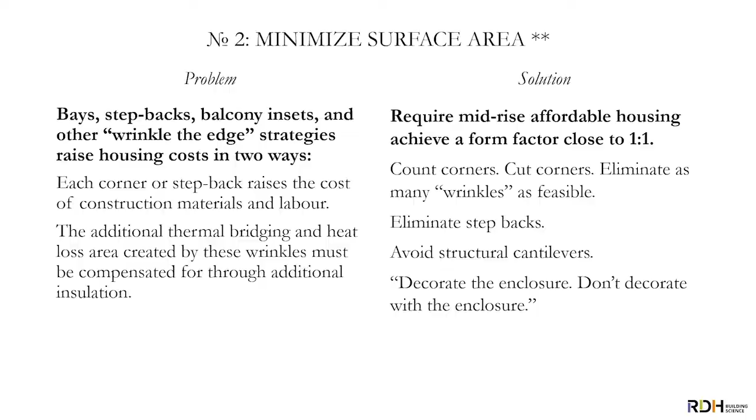Adopt this or a similar mantra from the very beginning, not halfway through the architectural process. Your best passive house architects will be preaching the same thing and will be completely on board.

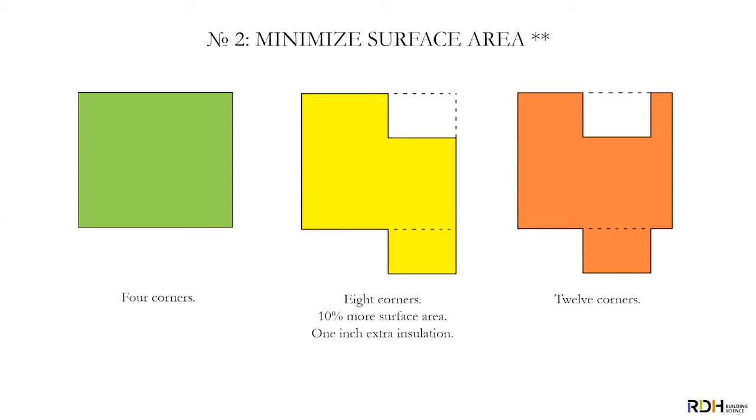Just quickly, you take a box, you've got 4 corners. You make it a balcony bump out, all of a sudden you have 8 corners. You're paying for each corner inside and out, and up to 1 extra inch of insulation. Move that over and you've got 12 corners, 20% more surface area, 2 inches of insulation.

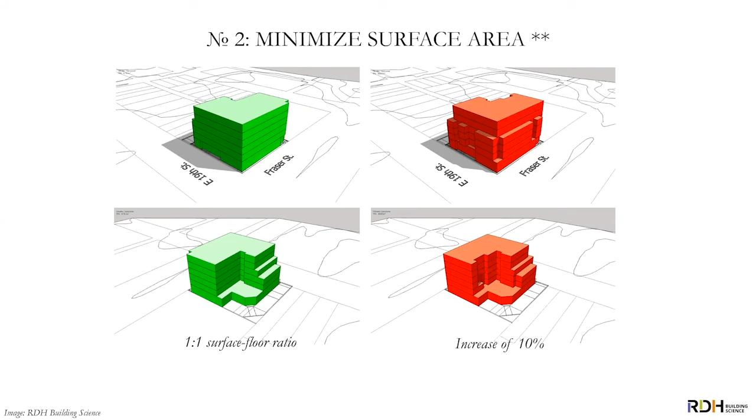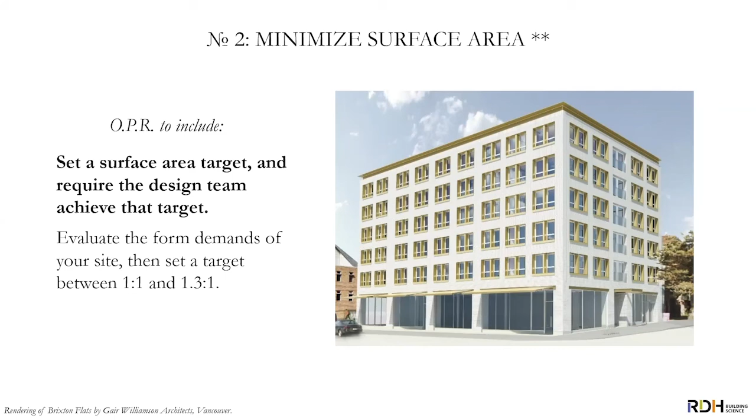So again, in your OPR, set a surface area target and require the design team to achieve it. Go ahead, have some discussion with the architectural team right at the beginning about form factor, but once you set a target, you manage to it.

Number 3: force your facade to follow function. Glazing in lieu of design, or glazing as design, are the mistakes that kill energy performance and drive up costs of so many buildings. How many times do you ask for design and they show you a glass box? There's no thought gone into it, it's just another glass box.

Look, I work for people who do some great technology work. We can make anything in passive house, but we can't make it affordable once you start drawing a glass box.

Only place a window where it has a function, it has a purpose, and where it is the best solution to serve that purpose. There are legitimate purposes: daylight, views, ventilation. Force your team to answer for every window and door: what's the purpose, does it serve the purpose? And force the group to look at the design from the inside out.

You can do other things on the outside, especially with shading, and other ways to make the building beautiful, but let the windows and doors serve a purpose.

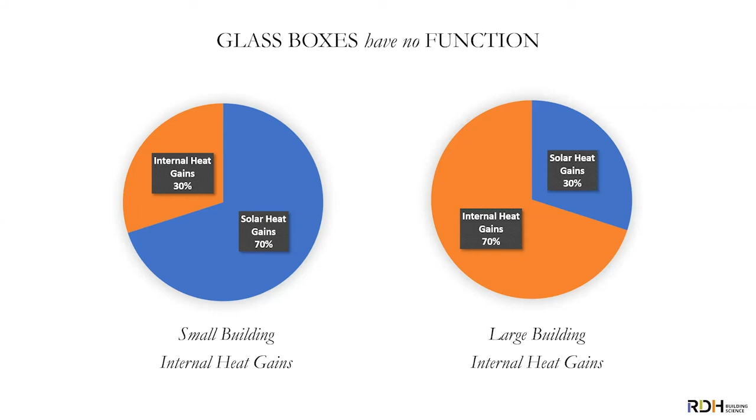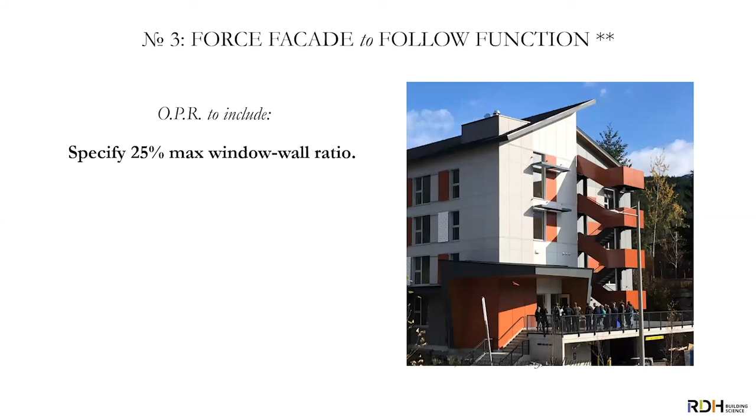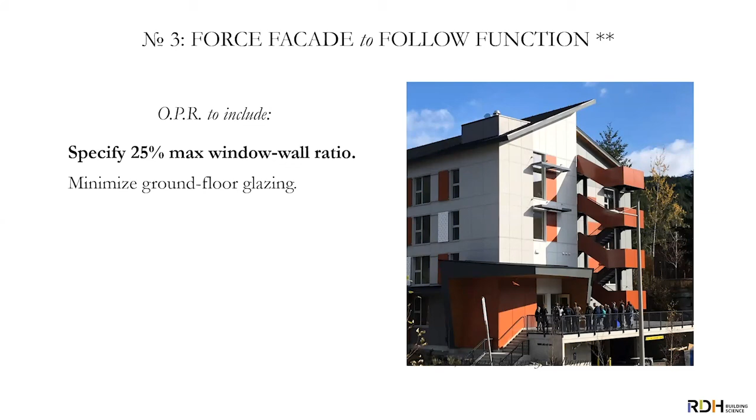I would take this approach to every window in the building. So specify a maximum window to wall ratio. If you don't have a number, start with 25%. It's fine to adjust that somewhat in consultation with your team, but have a number and manage against it. Minimize ground floor glazing, and most of all, demand that every window have a purpose.

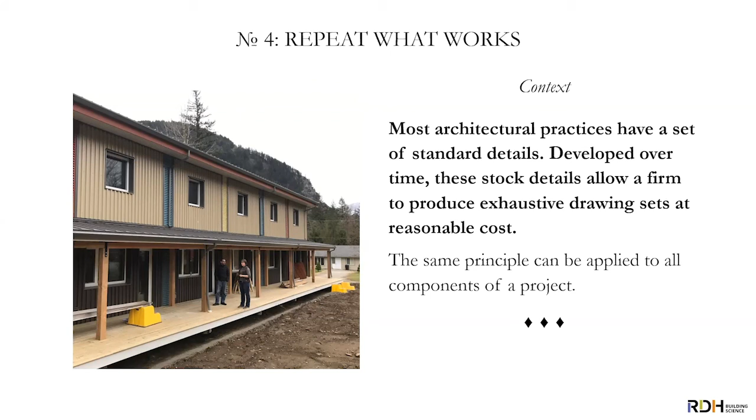Finally, repeat what works. Almost every architectural practice is based on a set of details that repeat over and over, and you have to reinvent all of these for Passive House. I'm simply urging us to apply the same principle to all the components of the project. Many municipal planners have developed a rigid aversion to repetition. I think we need to push back on that a little bit. Repeat what works - embrace repetition of excellent design. You can repeat details, components, wall panels, units, or entire buildings.

Once you have a good set of details that work in your climate zone for your building type, you can use them again and again and again. You can develop contracts with builders or enclosure engineers who've reviewed them for your previous project, and they will price your next project lower because they know that set of details really well. The new building maybe changes one or two, but otherwise they stay the same.

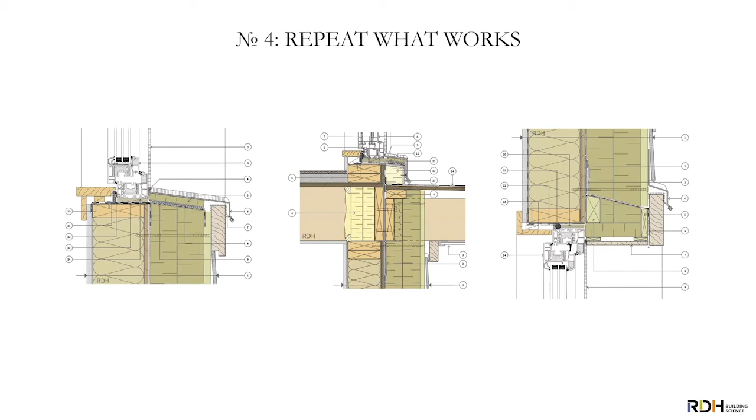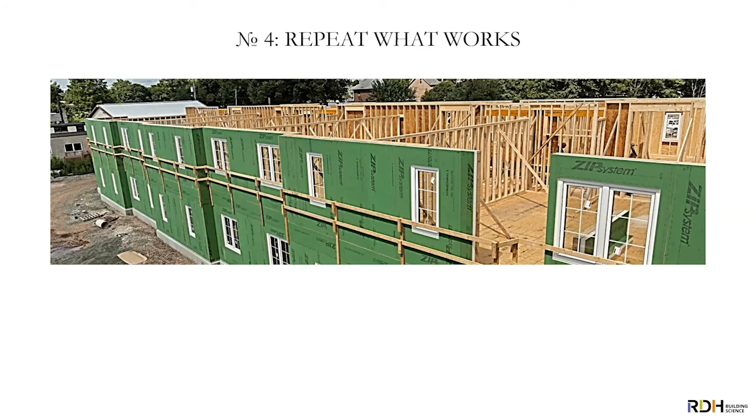You find a window that works for your design, use it again and again. You don't need 5 different size windows - pick one, use it again and again. In fact, extend the window to the whole wall. Find a wall panel with a window mounted in it that creates great repetition in a simple form. Use it again and again. It's a great way to minimize labor, maximize insulation, and minimize window area.

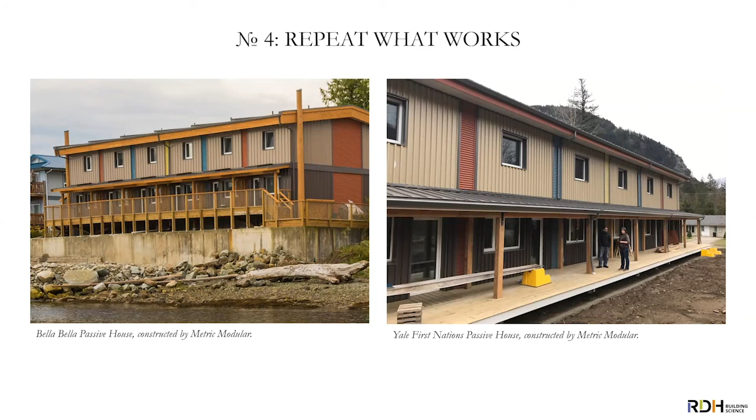But why stop at the wall? You could do a whole module. This entire development is 2 modules, one upstairs and one downstairs, and they repeat again and again. It made the building very affordable for a remote site where trades were hard to find. In fact, the building was so successful that after finishing the first one, we did another one with the exact same set of plans, the exact same pieces, in a different location. The second building cost approximately half the first building because so many of the design, development, and procurement costs had been ironed out, and there were a few cost savings we were able to recognize the second time. The third building is also very attractive - the more buildings you do, the cheaper it gets.